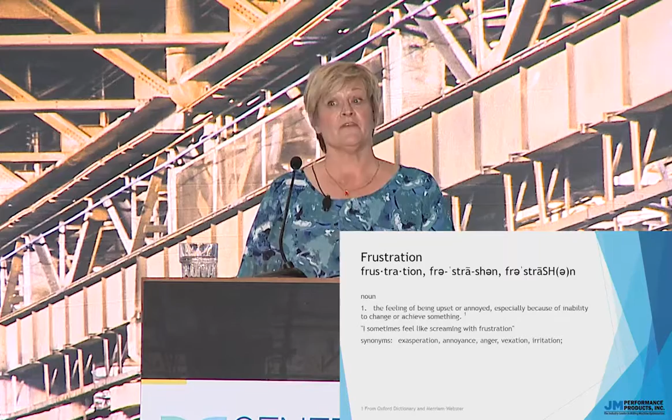As a manufacturer, we found a problem with all CNC mills used in manufacturing. It affects every CNC mill using V-flange tooling. Now, we found the problem. We found the cause of the problem. We found the fix to the problem. But getting that message out to people has been very difficult. And therein lies our frustration.

So I'm going to put it to you in a more universal term. Let's say that engineers at Toyota came forward and said something on the order of, we found a problem with all, in all cars, with the spark plugs. There's a problem with the spark plugs. Now, if we make a change to the spark plug, you're going to have better performance in your vehicle, better gas mileage, lower emissions, and it's a simple change.

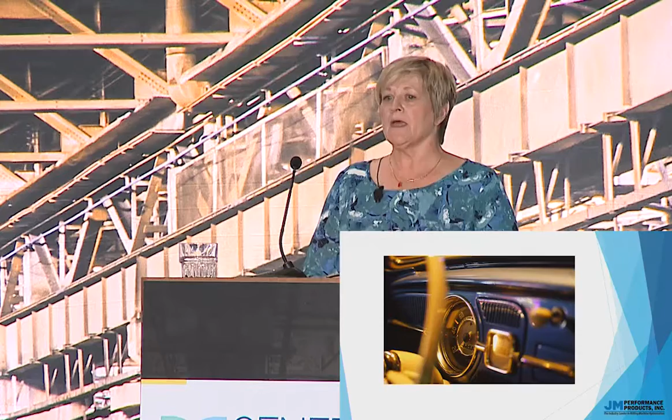It's not going to cost a lot of money to make this change. As a matter of fact, when you take your car in for a tune-up, your mechanic is just going to use these new spark plugs. You have options out there. You could buy an electric hybrid, sink $100,000 into an electric hybrid, or you can make this simple change in your spark plugs. And by the way, that simple change and the performance that you get from that simple change is guaranteed. So would you be interested?

Wouldn't that get your attention? I think it would get mine. I think the first thing I would do is make an appointment and get my car fixed.

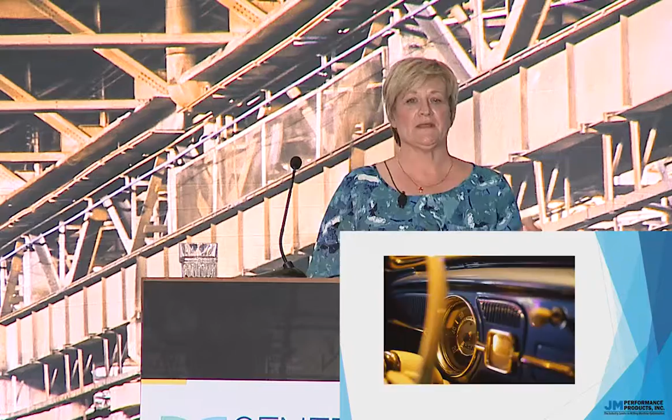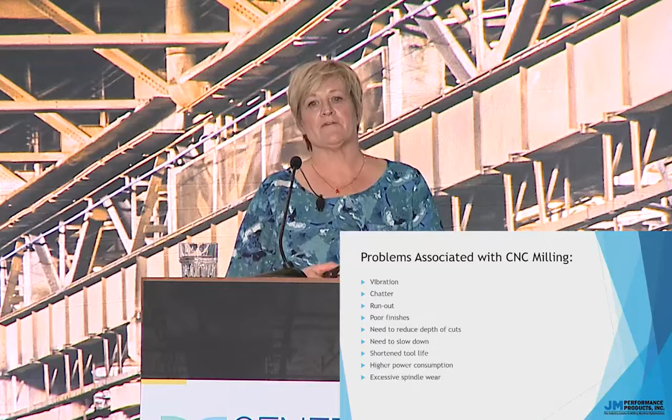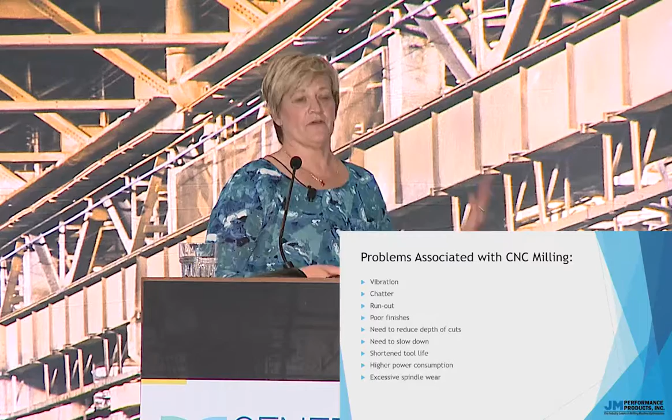So these are problems that are associated with every CNC mill that is running. And the problem is, because these problems are inherent, anyone who has ever done CNC milling has worked with these as part of their normal process. Vibration, chatter, poor finishes, all of these things, they all cost time. They all cost money. And they cost production.

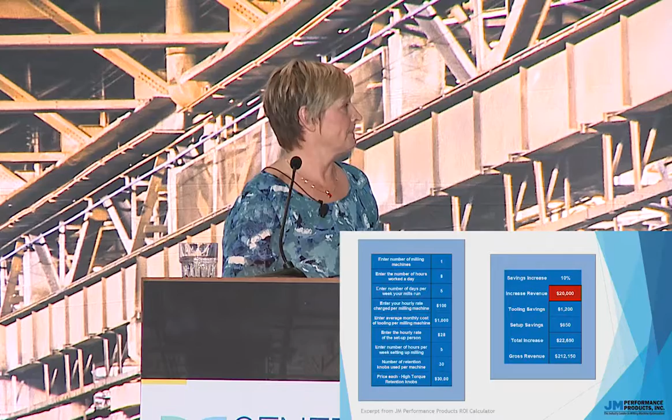Let's take it down to a really basic level. If you have one mill and you're running only a single shift, so you're running a single 8-hour shift 5 days a week, and you have 30 tools, by making a small change in your tooling, you could actually increase the production on that machine by $20,000 a year, which doesn't sound like a lot.

It really doesn't. But if you take that $20,000 and you apply it over 3,100 plus new mills that are brought into this country every year, that number grows to around $63 million.

It still doesn't seem like a lot of money, but there are 570,000 mills that have been put into production in this country in the last 15 years that are actively producing. That number gets bigger and bigger every time you look at it.

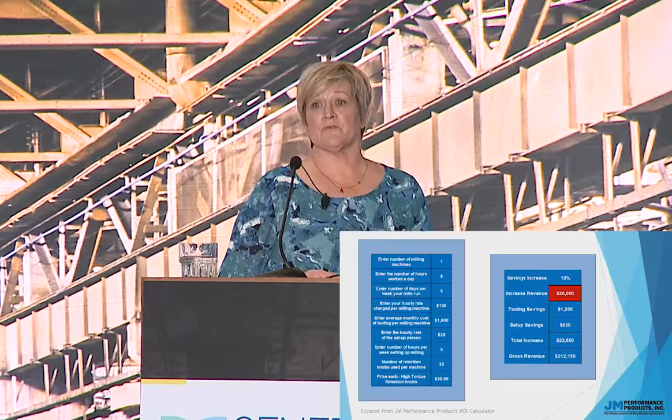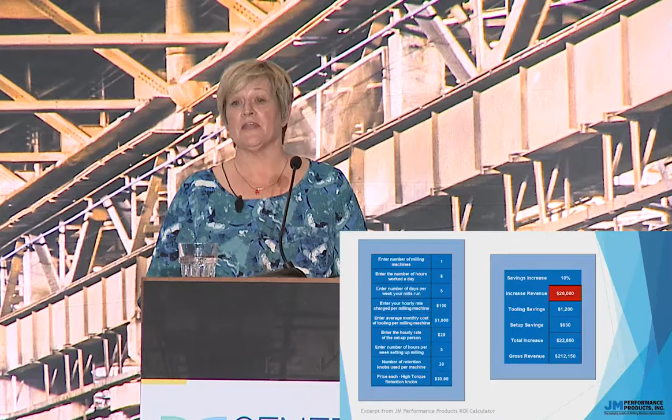Now again, we're looking at one mill, 8 hours, 5 days a week with 30 tools. So consider a facility that is running 25 or 50 or 100 or 150 mills, and their carousels have upwards of 150 tools, and they're running 24/7. That number becomes a staggering amount of money that this country leaves behind.

Now, one of the biggest savings that you'll find is in tool life. And the reason for this is that tooling flaw that caused all those problems, one of the biggest ones is vibration and chatter, and that just takes the edge off the tools.

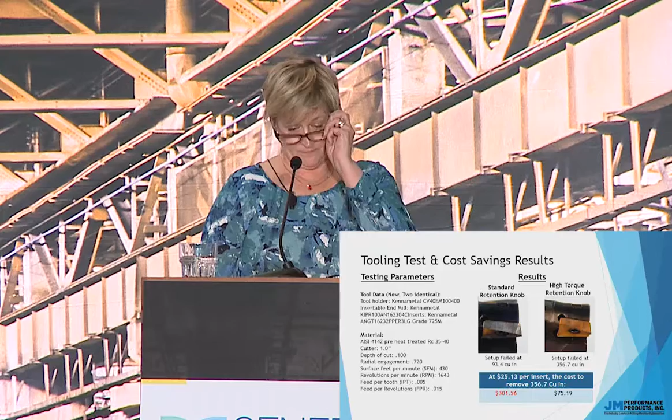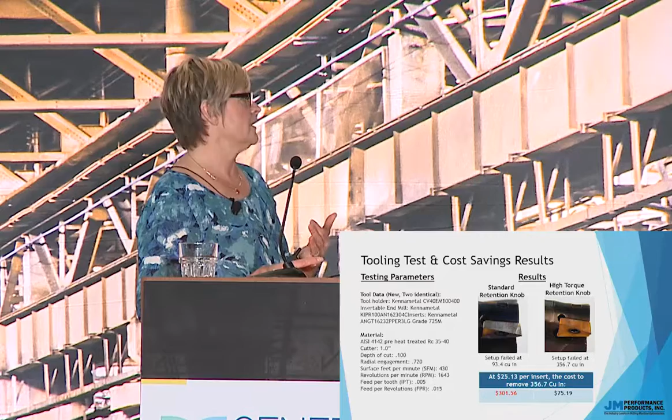We ran an independent test, and you can review the testing parameters, but essentially in 2 setups, there was only one change, and that change was a change in the retention knob from a standard retention knob to a high torque retention knob. You can see the materials that were cut. Everything was identical except for that.

And at the end of the day, what happened is that with the standard retention knob, that test failed at 93.4 cubic inches of material. But with the high torque knob, it went on to almost 4 times the amount of material removed. Now you can say, okay, that's great tool life extension. But the reality of it is if you look at it from the terms of the material that was removed, that was 4 times the material removed without having to stop production to change your tools.

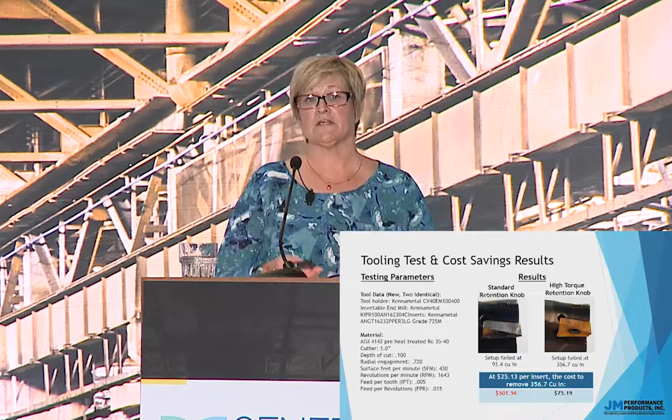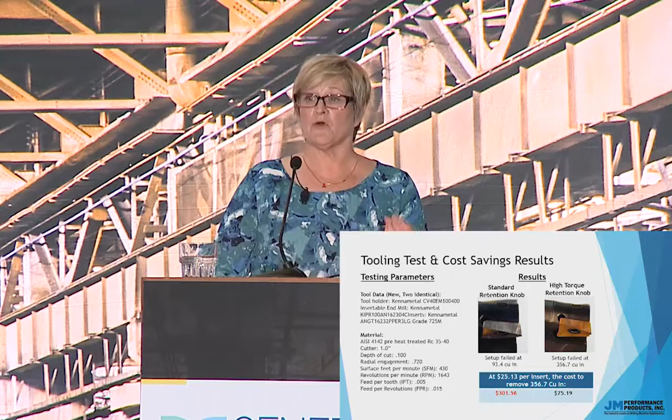That's significant. Now, if this was your car, you'd of course say, well, I drive a different car than was used in this test. I use different tires. I buy premium gasoline. Yes, you're going to see a difference depending on the material you use, on the tooling that you're using. But if you improve something, if you get rid of a problem, you're going to see improvement overall. And that's our point.

There's a large medical device manufacturer we worked with. They asked to remain anonymous, but they were losing business offshore. They just could not quote competitively enough. So we went in and examined a few things and found they did indeed have a tooling problem, and they also had some serious maintenance issues.

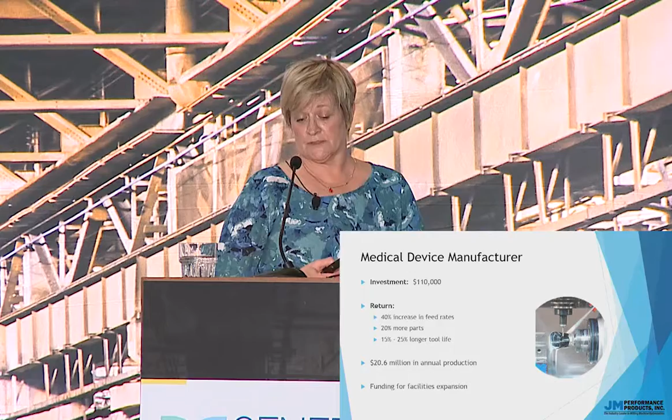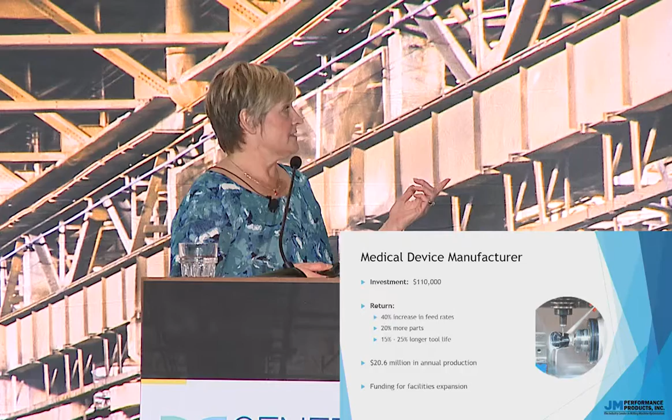What we also found is that if they played with that increase in tool life and balanced it with their speeds and feeds, they could increase their feed rates by 40%, which gave them 20% more parts on the floor, and they still maintained that added tool life of 15 to 25%, but they had an increase in production of $20.6 million that first year.

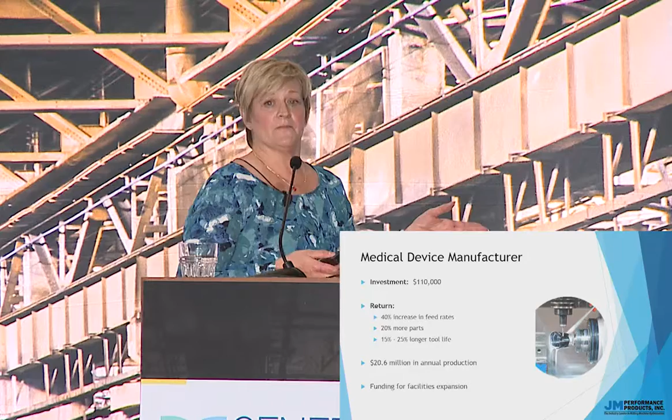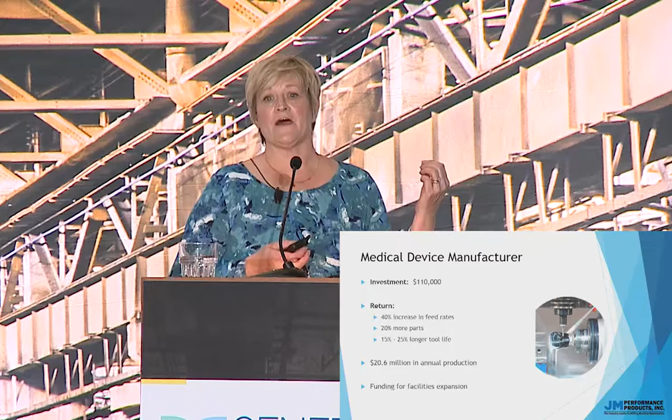And that is something they will carry forward, that's not going to go away. They were going to fund new equipment, capital expenditures on new equipment and some specialized tooling. They actually backed away from that and went into facilities expansion instead. Again, a $110,000 change yielded $20.6 million in annual production.

So you're going to ask me, what is the real problem? Well, the real problem is in V-flange tooling, you lose contact between the tool holder and the spindle. It may sound minor, but that tooling was designed for 100% contact over the entire surface of the tool holder. As soon as you lose that contact, you lose production and you lose tooling life.

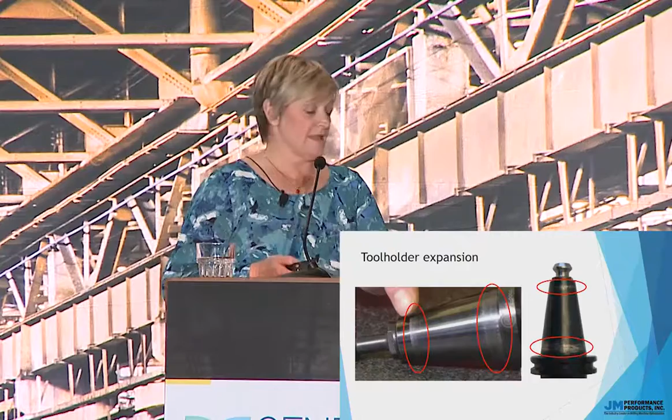There are things that cause that problem. But one of the things you can look at to find out if you're actually experiencing it is a weird wear pattern on your tool holders. Even if you're not on the production floor, it's very easy to go look for these signs. If there's a wear pattern at the very top, the thin portion of the tool holder, and a wear pattern at the bottom, and you see no wear in between, that means 75% of that holder never made contact with the spindle, and that is a major problem.

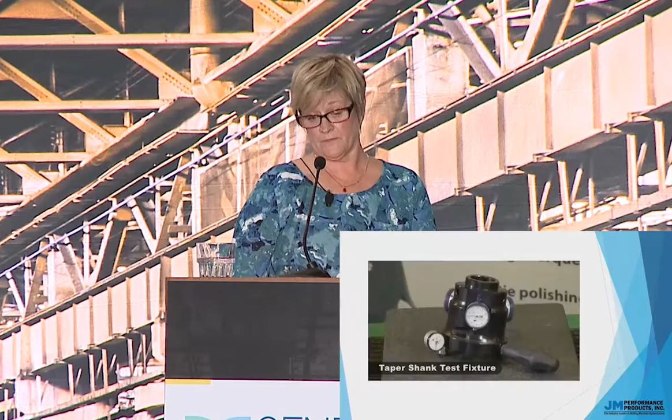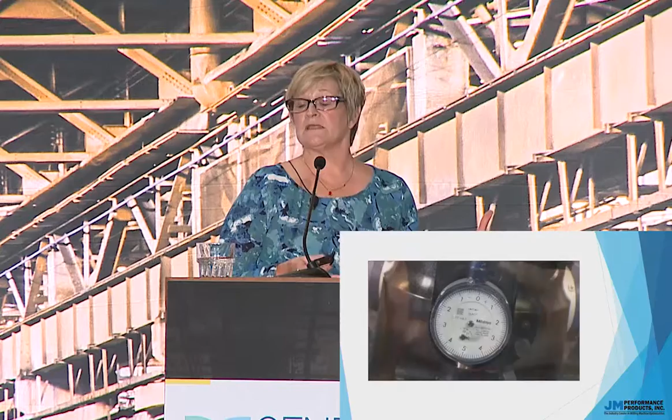Again, that is going to create that whole list of problems I showed earlier. So we designed this taper test fixture, and it mirrors the spindle. We took a bunch of tool holders and started testing them with this fixture. We found we didn't see growth in every single one of those holders, but the ones that did had a varying result, which adds to the problem because it adds to tool variability.

What happens is once that lack of contact occurs, you also open up the door for debris from milling, things like chips, coolant, and oil, to filter onto the surface of the spindle. It's not going to happen evenly because the motion of that tool holder within the spindle is kind of random. But once that debris gets up into the spindle, you lose more contact.

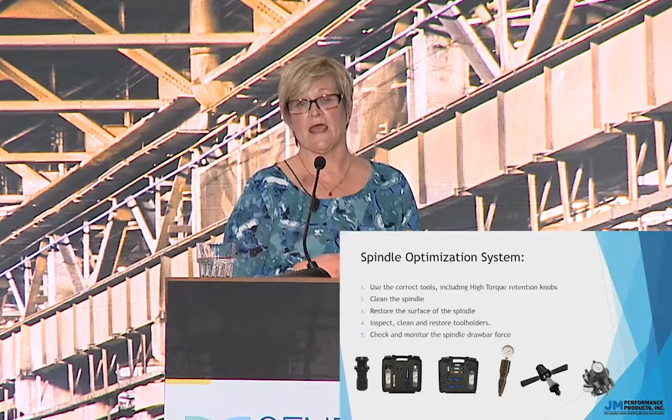So we designed a complement of products, and these products are all designed to make sure the spindle and the taper marry up correctly, that you have 100% contact. Once you have that 100% contact, you have a reduction in vibration and chatter. You use less energy in your mill, and you have the potential to increase your speeds and feed rates and actually increase your production.

It's a very easy system to implement. It's a very inexpensive system to implement, and it takes care of a whole list of problems, the vibration, the chatter. But on the other side of that, you're also going to see improved tolerances from improved tool rigidity. That means you don't have the secondary finishing and polishing time—it's either reduced or totally eliminated.

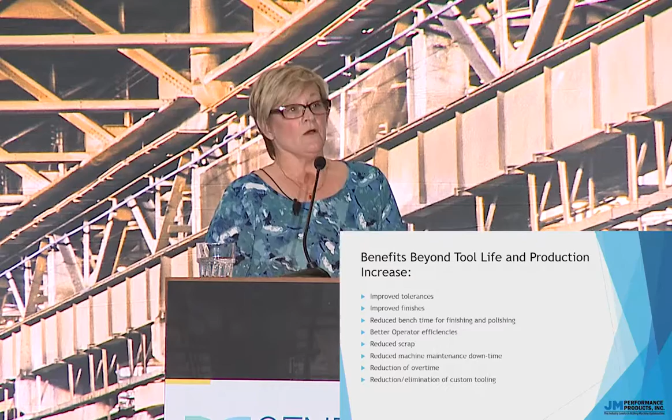You also don't have to constantly monitor what's going on, so your operators can move on. You can actually start moving into that lights-out type of manufacturing. You have better tolerances, which reduce scrap. And because the tools locate consistently the same time, you have wear and tear on the spindle and machine reduced, and that cuts down on expensive maintenance time.

Because you can increase your speeds and feeds, then you can meet your contracts without expensive overtime. And the need for custom tooling in order to make some of these really precision parts is actually eliminated. This tooling system was designed to be extremely accurate and extremely affordable. It was designed to create precision tools. By making a slight change in how you install your tooling and how you maintain your spindle, you can return it to the way it was designed.

At this point, I'm going to turn this back over to Janos, and he's going to describe how all the little points, all the little details do make a big difference in moving a company forward.

You need that? Thank you.

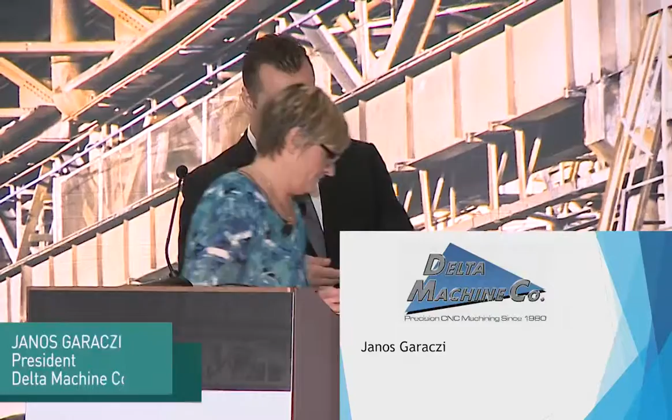Good afternoon, everybody. My name is Janos. I'm president and owner of Delta Machine Company LLC. We are based out of Gardena, California, which is in the South Bay area of Los Angeles. We specialize in difficult and very difficult precision parts, titanium and 5-axis machining, multi-axis turning.

A little bit about me, I'm from Hungary, Eastern Europe. I came here in 2000 with nothing, and my mother passed away a couple of years later, so we got stranded here with my brother. We went through a lot of hardship, and eventually I got into construction.

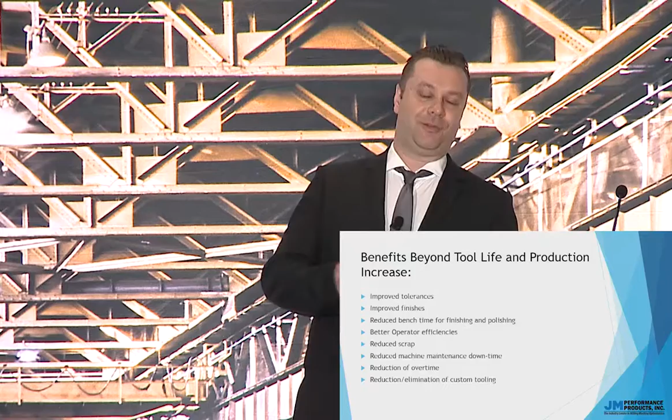Originally, I started programming when I was 8 years old, so I had a really strong programming background. I was very good in math and physics, but I couldn't apply it here. You plan and life happens. I got into construction, and when I was 25, I opened my first company. It was going really well until the recession came, the market crashed, and I lost everything.

In 2011, I became homeless. So the same year, I was looking for something else, and I got into CNC machining. I took a course on how to program it, and I realized with my programming background that was very, very simple.

So I started working at Delta Machine. From there, I learned the trade very quickly, and a couple of years later the previous owner wanted to retire. He asked me if I wanted to buy the business. I said, yeah, I'm definitely interested. That was probably one of the best decisions of my life.

When I bought the business, it had some 30-year-old equipment, a few mills, a couple of lathes, and I was like, okay, how am I going to make this something different? I didn't want to just make a living. So I looked at how to change the whole thing, which today is a multi-million-dollar business, which we built in less than 2 years.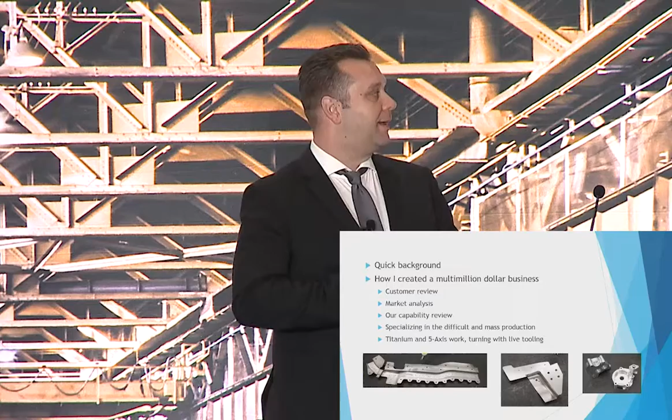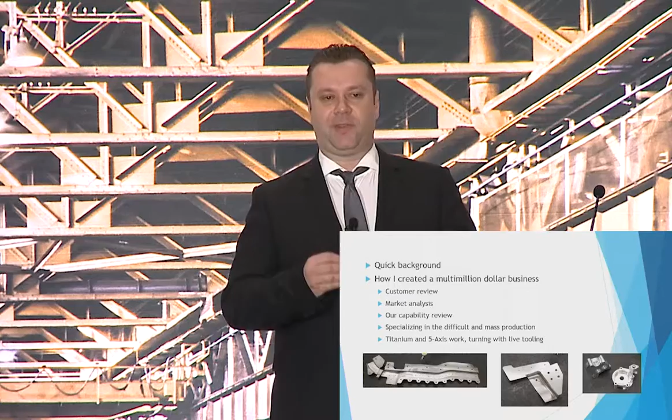One of my major things was that I looked at our business and analyzed it: okay, what's our problem? We're doing precision parts in a niche market, titanium, a lot of stainless steels, really precise parts dealing with tenths. We had no problem with that, but we were not making money.

So I started analyzing our customer base, and I realized our biggest problem is that we're very busy, but busy with jobs that aren't making money, or with customers who don't pay on time, and everything is a struggle. Then I looked at where the market is going.

That's actually one of the biggest problems I see with machine shops and manufacturing today, that people don't go with the flow. They think whatever they're doing today is going to still be okay to do in 5 or 10 years. I talk with people who've been in the industry for 20, 30, 40 years, and they say, you never even learned this trade, how can you do so well in it? How can you grow this fast? How can you do what you do?

That was one of the things I realized: what is our capability, what can we do, and how can we move forward from that? I knew we do very precise parts, and that's a niche market. And mass production, we were doing tens of thousands of parts, so it should have been easy to make money.

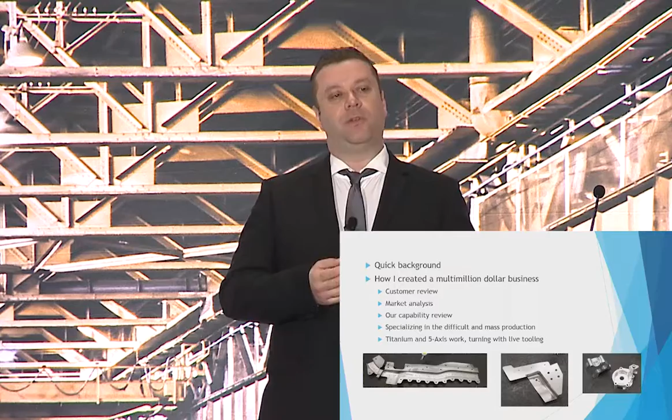I realized the equipment we had was very old; we couldn't use it. So I was looking at what's the new trend, and I realized I had to figure out how to make what we're doing right now more efficient. One of the things was to go 5-axis, which reduced setup times and we lost less accuracy on the part.

Suddenly, when we started growing, I didn't have a 5-axis yet. First I was looking at, okay, we have so much work, how can we grow? So I was thinking of opening another shift. I realized that's going to cost me another $20,000 to $30,000 a month. How much is a machine that can work several shifts by itself?

So I invested in automation and bought a horizontal cell, and that one is running basically 4 shifts a week, running 7 days a week, 24 hours a day. I quickly realized that was a really good decision.

Originally, because we were a small company, the banks were saying, are you crazy? You can't do it, you're too small, it doesn't make sense. But soon after the first quarter, they saw the numbers we started to generate. Then they're like, oh my God, you can buy whatever you want. So after that, it was very easy to move forward.

Because I started concentrating on what we're good at, and what I'm really good at is programming and titanium, so difficult parts. Like some of the parts we have down here, there's nothing flat on them. You can't really see it in the picture, but it's ridiculously complex. But I like this stuff because this is what I learned on, similar things that are already difficult, and I enjoy working on these parts.

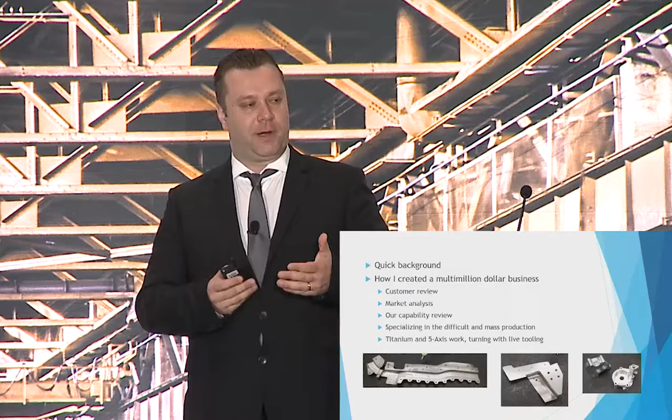It's because we see where the market is and what we need to concentrate on. The problem is, like the first part, the competition, whoever was making it before us, their cycle time was over 19 hours, and they could make maybe 5 or 6 parts a week. I did that part in less than 11 hours, and we could supply 30 parts a week.

Because we're running 24/7. Once we started becoming steady, suddenly they canceled their contract with the other company and just gave everything to us.

That was the key when I realized that the biggest problem today, especially if you deal with aerospace, with Boeing or Airbus, is they don't care about the money as much as whether you can deliver enough parts fast enough, on time, and with good quality. These things are very important. And for us, it was very...

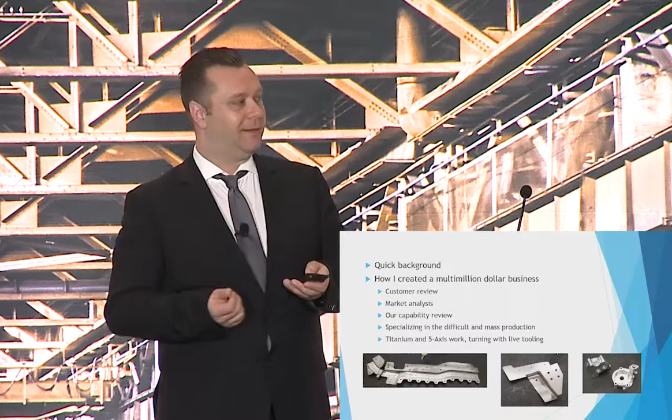Fortunate that I really caught onto 5-axis machining very quickly, and we can make really complicated parts.

It got to the point that I started testing out different end mill manufacturers for titanium machining. When they realized I was pushing their tools well beyond the limits of what they could achieve in their own testing facilities, they started coming in and asking questions, like how do you do that? How come your tool life is almost double ours, and we have everything on our hand?

That was one of the things I realized a lot of people aren't doing: paying attention to every little thing. Earlier today I heard a couple of really great presentations where everybody talks about the grand scale of things, how you can optimize and make the whole chain work better. But nobody was really talking about how to make the manufacturing itself, the actual making of parts, a little bit better and faster.

And that's where it comes in, that you have to concentrate on every little thing, and everything has almost the same importance. That's where I came across JM Performance, who was making these special high torque retention knobs. But first, the very important thing is fixturing when you're doing machining.

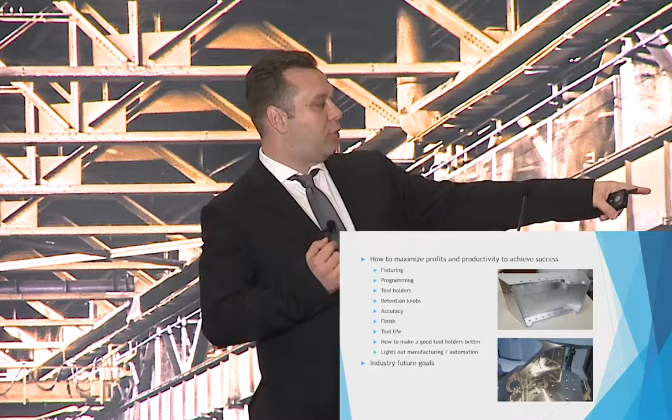These parts you can see here are without benching. This is the quality we get right off the machine. The lower part is for the 787 Boeing engine mounts, and that's forged titanium. The quality is like something out of a dream, but that's actually the quality that comes off the machines.

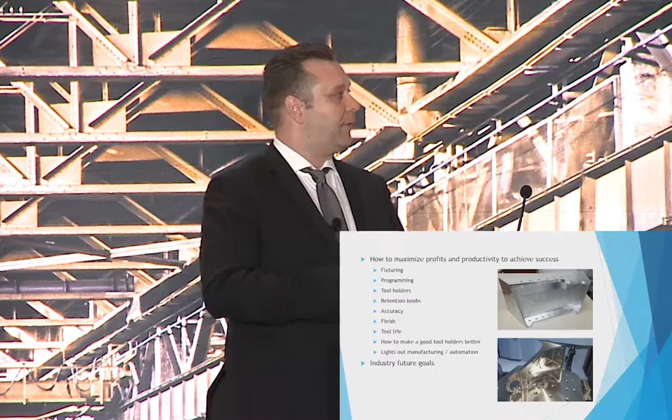I realized programming is very important, how you approach the problems, because for that part, the company I took work from, their cycle time was over 12 hours, and they were very proud of it, until I told them I'd do it in 5 hours, 54 minutes. And then suddenly it's like, oh, how do you do that?

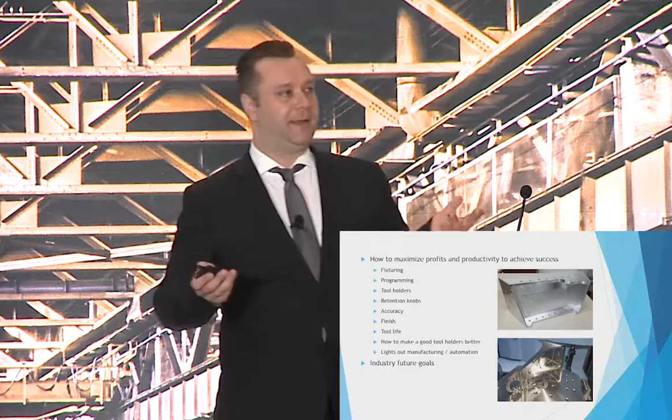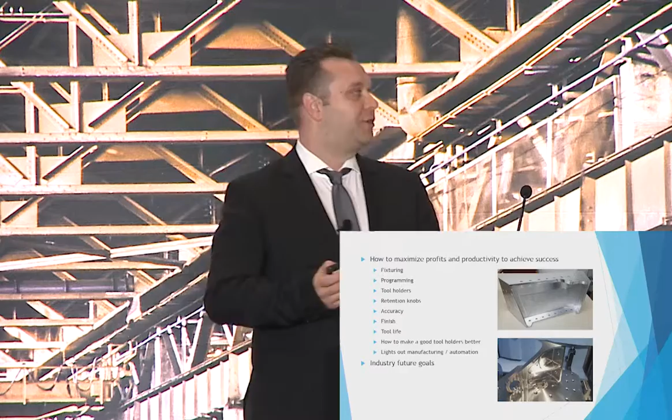Well, I'm not going to tell you everything, but there's a lot of tricks to it. Some of the things people underestimate in manufacturing, how important these key things are, like fixturing, programming, using the right method. Everybody thinks the newest thing is the best.

It's not true. What makes me very successful with the programs I run is I play with it. I do a lot of work and try different things. I try the newest technologies. I try the newest tools.

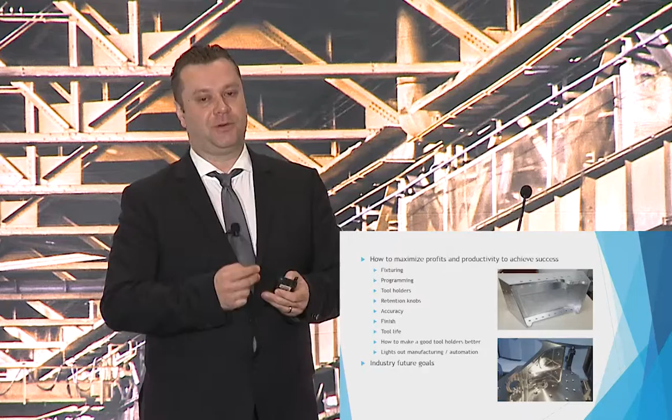And now I'm in bed with most of the largest manufacturers doing constant tests for them, trying to help them develop better tools for titanium machining, which I think is going to be one of the biggest things in the future because it's becoming a larger part of aerospace, medical, military applications, and soon probably automotive and everywhere. So you need to be able to machine it.

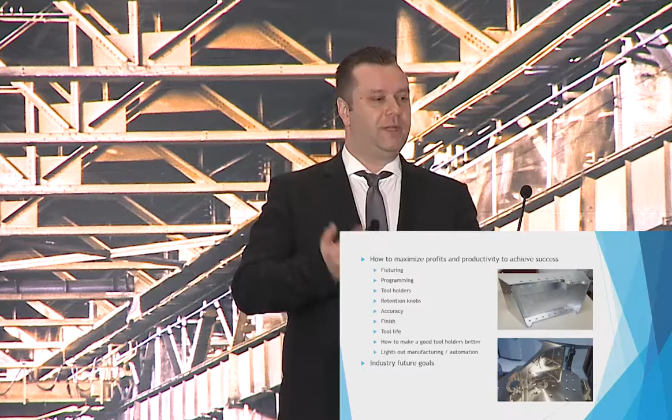A lot of people are scared of it. I like it. For me, I cut titanium almost as fast as aluminum. That's the big difference, that I spent the time and invested in developing better ways to cut it, tried out different tools, different methods, how I can push.

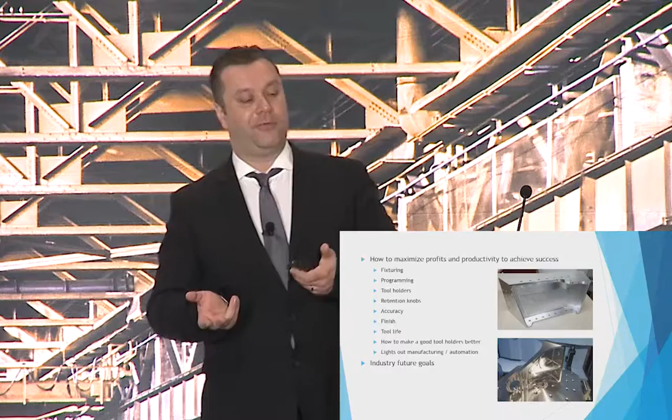Another thing that was very interesting when I changed to these high torque retention knobs, what I saw is how much better our finish got and how much better tool life we got. So some of the end mills that we were getting 2.5 hour tool life in titanium suddenly went to 4.5, 5 hours. That was because I used the best holders, best hydraulic chucks.

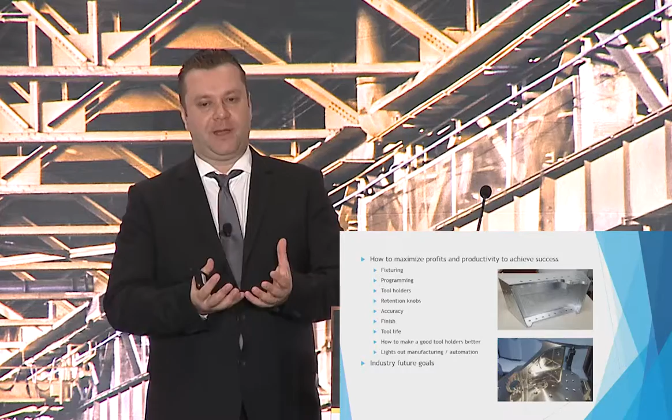I had an application engineer from one of the manufacturers come in. He's like, what is different? We're using the same thing, you're using our holders, you're using everything the same, but your tools last longer. And the difference, what they didn't have, is the retention knobs. It seems like a very small thing, but it makes a really huge difference.

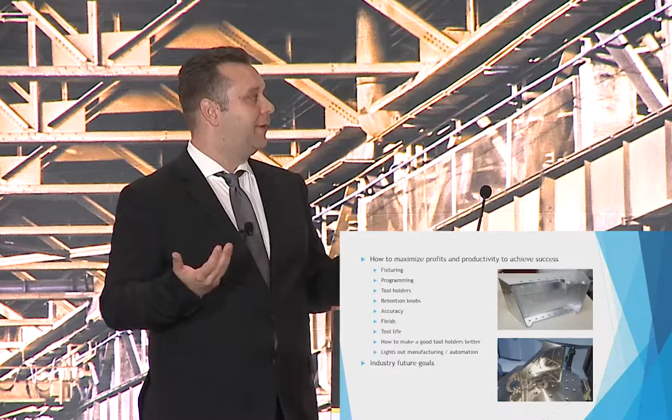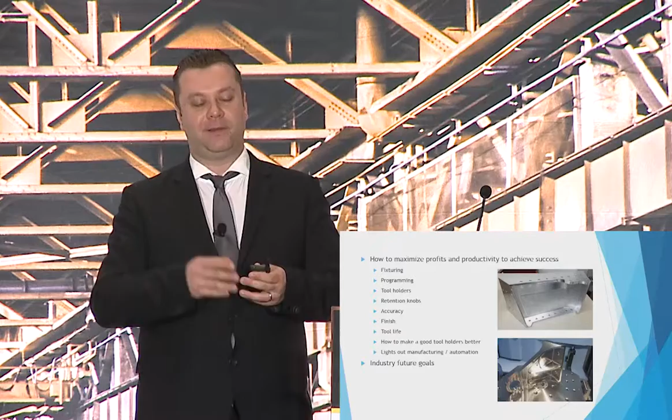I can go faster, I can get a better finish, and my tool life lasts a lot longer, which basically saves my cost. When you're running long-term production like we do, where you have 5, 10, 15-year contracts, pretty much you know how much it costs you. You can optimize a little over the years and save a little time, but the real cost in titanium is your tooling cost, because it's not like aluminum where you can cut with a tool forever.

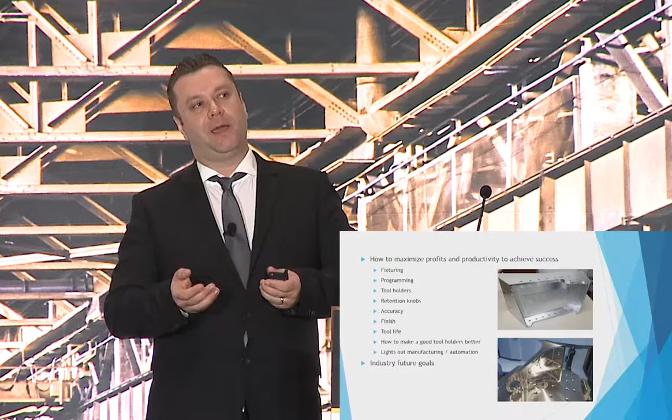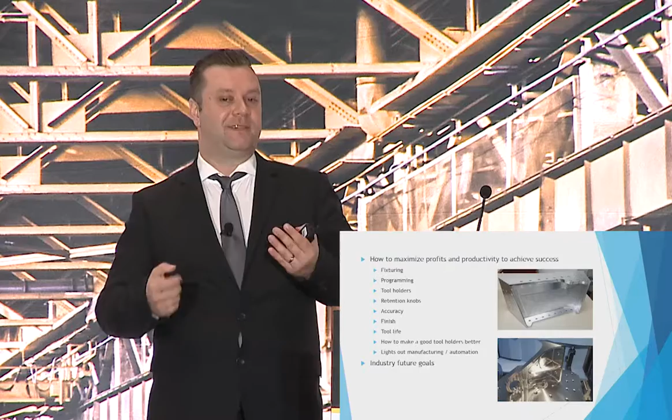There's a certain amount of time. So by optimizing or increasing your tool life, you're saving money. And you have a choice pretty much, do you want to go faster and save cycle time, or do you want to go a little slower and save tool life?

So I analyze everything. I'm very analytical. I look at every little thing. I love to micromanage everything, which drives some people crazy at the shop, but that's their problem. I enjoy what I do, and it really helps us succeed that we're concentrating on top edge.

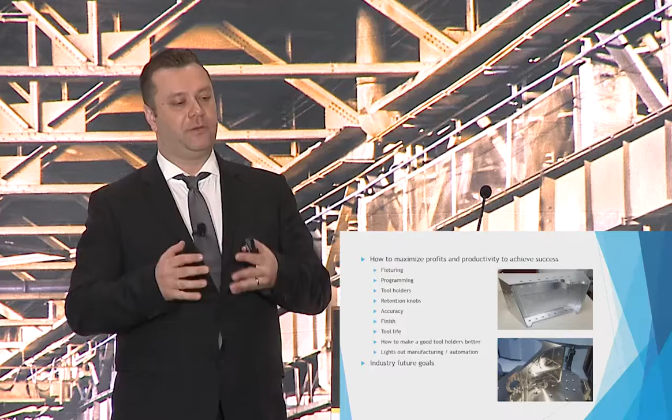The equipment we have is running 24/7. We're going with the latest technologies, the best machines, because that's what sets us apart. And our growth, if you look at it, it's like a hyperbola. It's insanely fast. Last year we were 30% up. This year we will be doubling our business, and it just keeps growing.

It's because everything we do, every company we deal with, they suddenly realize how beneficial it is for them also to deal with somebody who can understand these complex metal parts. Sometimes customers bring easy parts, and I tell them I don't want it. They ask me why, because everybody wants that part. Everybody wants that job where it's easy to make.

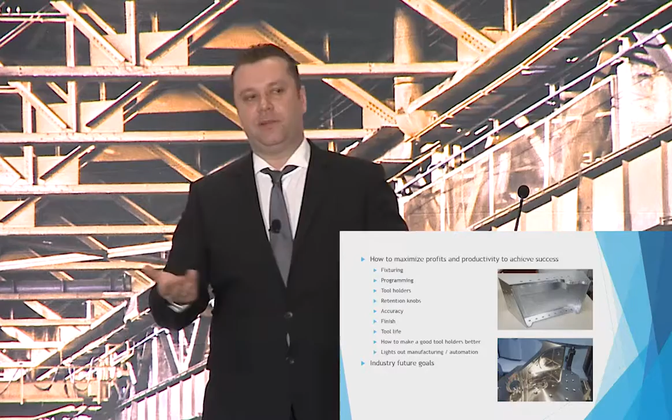There is no money in that. There is no challenge for me in that. That was one of the important things, I wanted to set myself apart from everybody. I didn't want to follow everybody's method. And that's sometimes what people ask me, how can you grow this fast?

As I was mentioning, I never learned this in school or anything. I just picked it up and learned the tricks. I was like, well, I'm not inside the box, I don't even know there is a box. So I really think differently and approach problems differently. And apparently it's working really well.

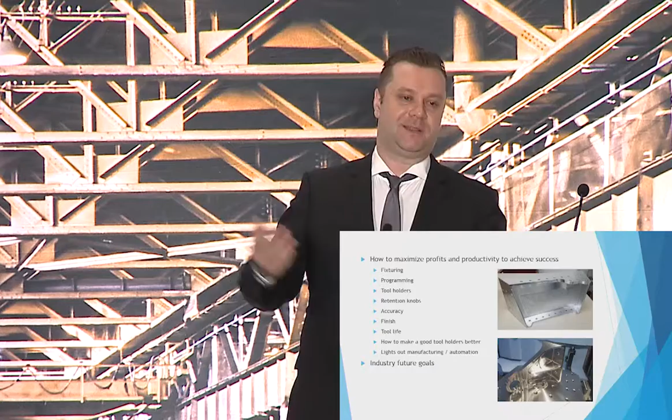Now it's getting to the point that much larger companies than us, like 100 times bigger, are asking me if I can go in and teach their programmers, everybody, how they should approach their own product lines. It's just very interesting how much we grew in such a short time and how we got to the head of the competition so quickly.

So a little bit about one of the other things that's very important: lights-out manufacturing and automation.

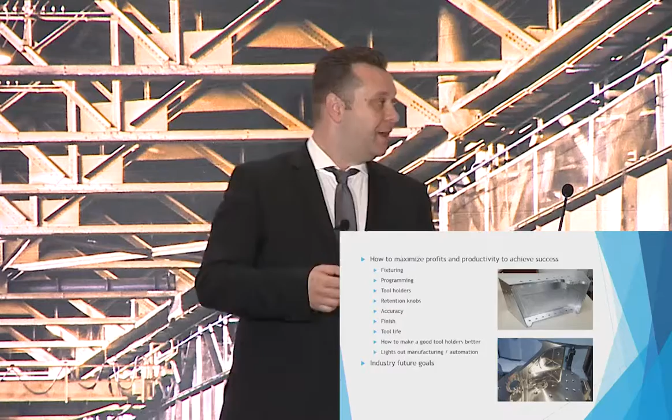I realized early on that's the key for the future. And it's what I'm doing with my employees, because it becomes a big question: what are you going to do with the regular employees right now? You have to train them, force them to go to school, learn how to fix a robot, learn how to program, learn how to set up, because that's going to be the future. Everything else is going to be automation.

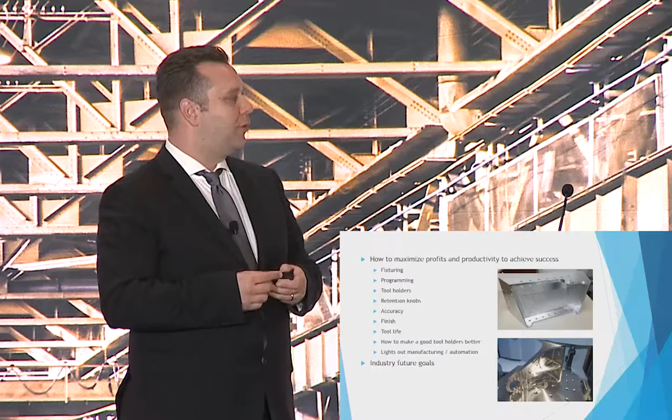The future goals for the industry are basically to be a flagship company in titanium and 5-axis manufacturing, growing a lot more, and actually helping people realize their own shop's potential. Because a lot of times I go to other shops and I see they've been doing the same thing for a decade or a couple of decades or 40 years, and they don't want to change.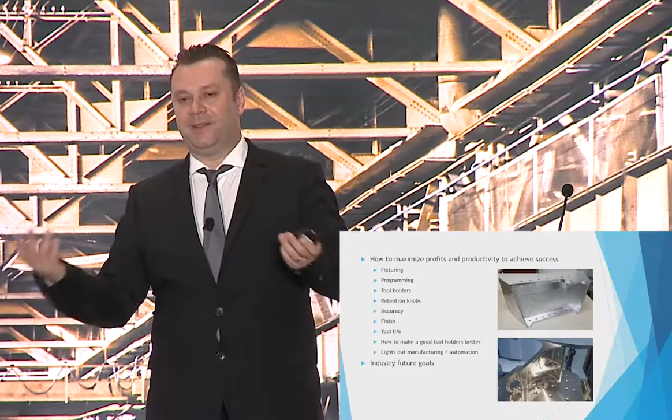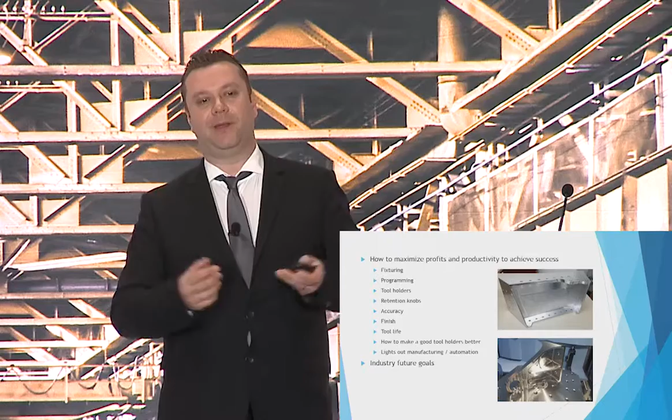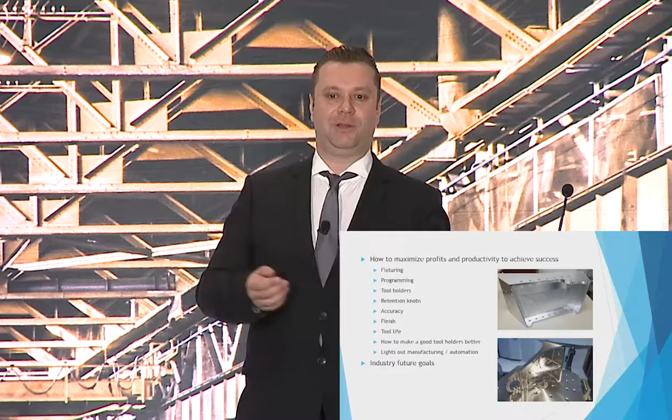That's one of the things you have to change. As I heard so many things earlier today, that's exactly how I'm thinking, that you have to stay ahead of the curve. You have to realize that if you stand still, everything is going to pass by you, and by the time you realize it, it's going to be too late. So it's very important that you invest in yourself, in your company, in your people, and of course in your equipment and your knowledge to advance in this era where pretty much the future is automation and super technology, everything. So that's in a nutshell.

I think we have a few more minutes if somebody has questions. Yes? So I have a couple of questions.

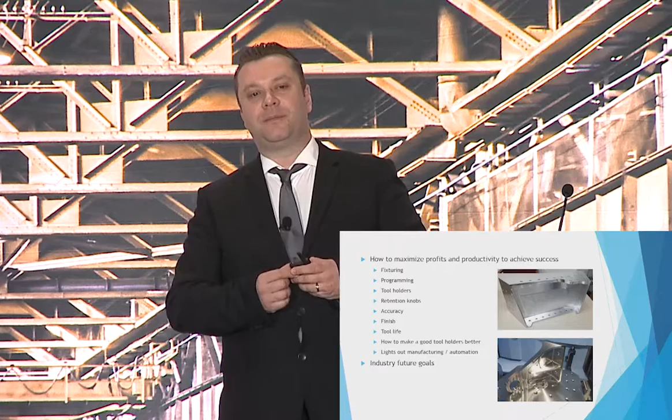My first one is, how do you approach strategic partners? Is that something that you have or are open to? And second, how do you plan to scale your business?

Very good questions, especially, yes, I get approached by big companies now that see what our potential is, and they want to basically implement my method of thinking. I'm open to it, but only to a level where I don't want to teach them every trick. I want to give them ideas that they don't follow, because the biggest problem is that most shops are going for the easy things.

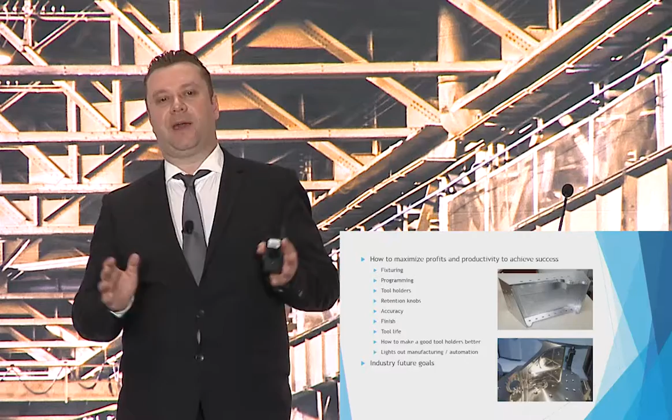And when they face difficulties or difficult parts or difficult materials, immediately they just back up and can't do it, or they take forever. That's one of the things I think everybody can improve. Even I do. I improve every day on everything we run.

And your second question was, I'm sorry? Yeah, how do you plan to scale? Oh, to scale the business, yeah.

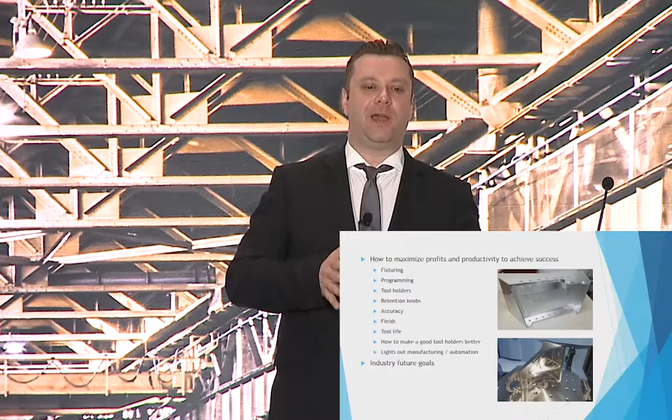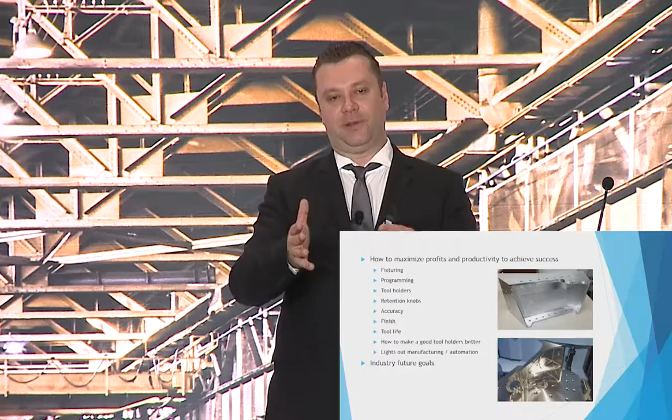So I think in 10 years, we're going to be probably 50 times the size we are right now, because right now we outgrew the place where we are in a year and a half, and now every time I buy a machine, even the machinery dealers ask me, where are you going to put it? I'm like, I play Tetris in the shop, move stuff around to fit more machines. But next year we're going to grow more, and we have to buy a much bigger building and move on, and once we fill that up, then we grow up again.

People say, what's enough? And I think there's no such thing as enough. It's about how long you're excited about what you're doing, and whether you have bigger goals where you can actually dream big. I came here with nothing. I was homeless a few years ago, and now I own a multi-million-dollar company, which is growing. It's pretty much the American dream, that you can achieve anything here if you work hard and put a lot of effort into it.

Anyway, anybody else? Yes, ma'am.

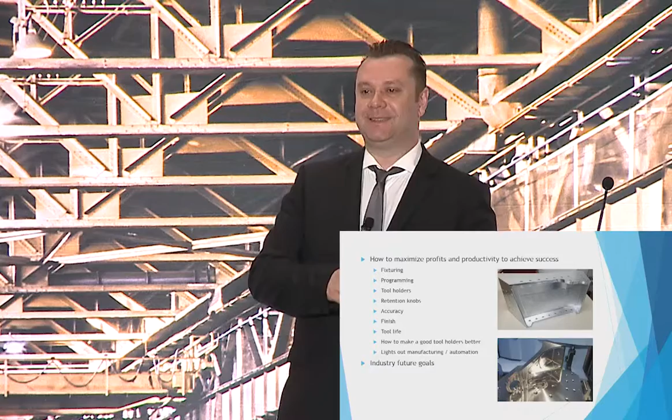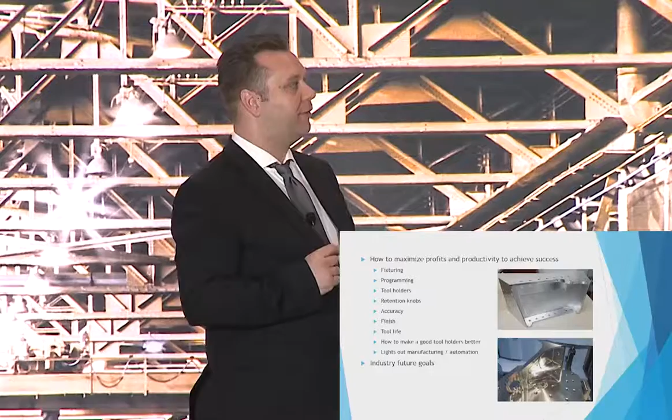Yes, we run aluminum. The top part is actually an aluminum bracket, for a Predator drone, and there we can go faster, a lot faster. I mean, I pushed so fast that we have coolant chillers on every machine because of the titanium. When I was cutting that, the guys from the coolant chiller company asked, what are you doing? Because the coolant temperature went from 63 to 87 in 30 minutes.

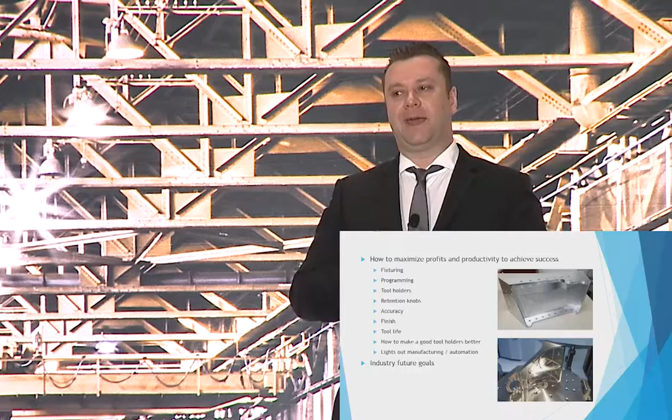So they asked, what is it? Because I can push the materials so much harder that everything just heats up, so you have to actually cool it. But yes, the finish is amazing, what you can get with it. I have other machines, a couple which don't have that, and I cannot achieve finishes like this. And the tool life is crazy. I ran 40 parts, each taking about 9 hours to make. It's a pretty big aluminum bracket. I never changed the tool yet, and we've already run about 40 parts.